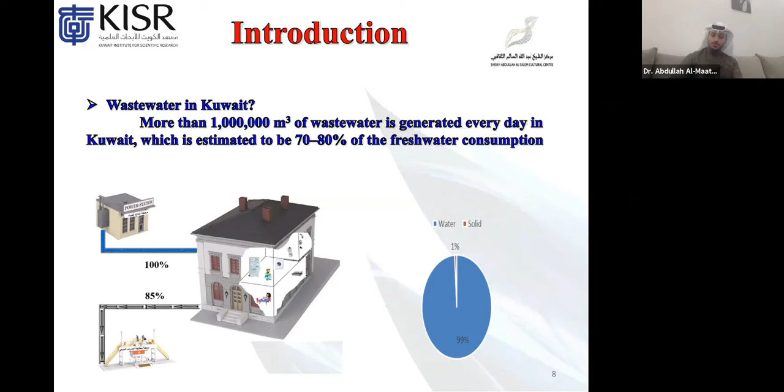Now let me give you a brief about how many wastewater treatment plants are in Kuwait and where the locations of our treatment plants are. In Kuwait we have 4 main treatment plants, and these plants are the domestic wastewater plants, which treat domestic waste from houses and from hospitals.

We have Riqqa, which was established in 1982, with a capacity of around 180,000 cubic meters per day. Al-Hayman, established around 2000, has a capacity of around 27,000 cubic meters per day.

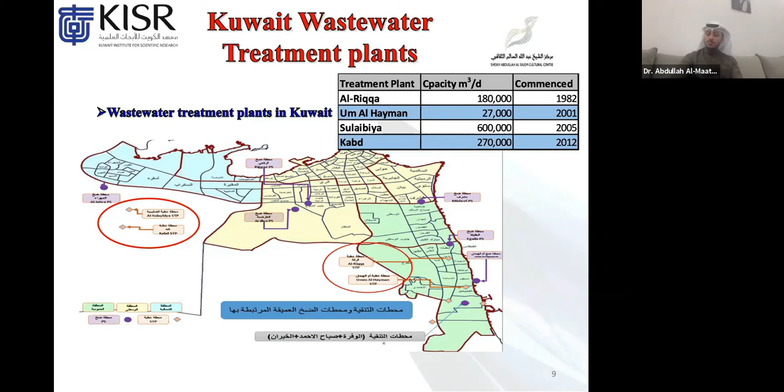We have the Sulaibiya wastewater treatment plant, which is the most advanced treatment plant in Kuwait, established in 2005, with a capacity of around 600,000 cubic meters per day. Finally, we have the Kabd wastewater treatment plant, established in 2012, with a capacity of around 270,000 cubic meters per day.

If we want to speak about the treatment processes in Kuwait, most of our treatment plants have common stages and processes. There are 3 stages of the wastewater treatment process, known as the primary treatment stage, the secondary treatment stage, and the tertiary treatment stage. In each stage we are tackling a different pollutant or contaminant.

We can also add one more stage, which we call the advanced treatment stage, used for a specific application. The more stages that we apply, the cleaner water that we can get. So it depends on how many stages we use to get clean water. I will go briefly through each stage, what it contains, and what contaminant we are tackling in each stage.

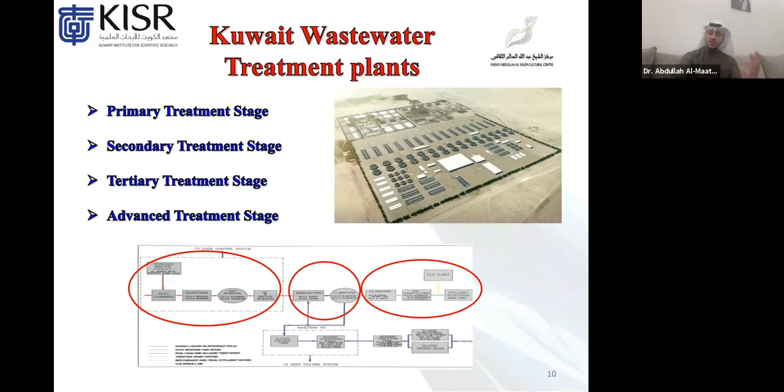In the primary treatment stage, the stage contains screening, grit removal, and oil and grease removal. First, when the wastewater enters the wastewater treatment plant, it reaches the coarse bar screens, which remove large particles before entering the treatment plant.

After the coarse bar screen, it goes through fine screens to remove smaller objects such as cigarettes, matches, and undigested food. We prevent all of these objects from entering the treatment plant to protect the pumps from any object that can destroy them.

After the fine bars, it goes to the third stage, which is grit removal, a gravel chamber which removes gravel and grit from the water. After the primary stage, we move to the secondary stage, which is the activated sludge. The activated sludge is the main process in the treatment plant, and this process is the basic process in all the treatment plants in Kuwait.

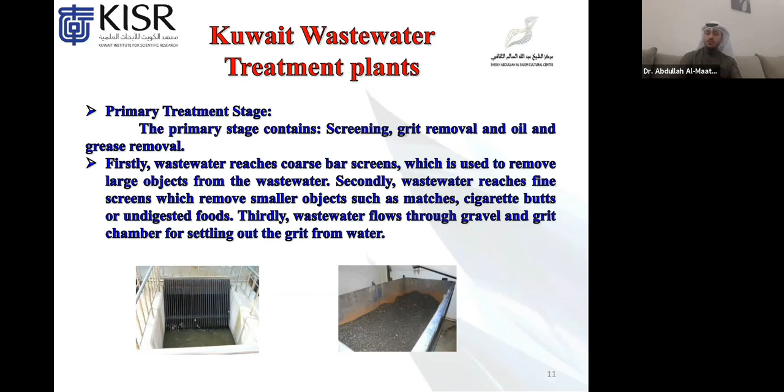It's based on a natural process, where bacteria is used to consume and biodegrade the organics, carbon, and nutrients in the wastewater. To simplify, the bacteria acts as a cleaner, eating and biodegrading the organics and pollutants in the wastewater. The bacteria acts like a human - it needs oxygen, it needs food, which is the pollutants and contaminants, and it needs air to breathe.

So air is supplied in this process, which is activated sludge. The air is supplied for two main reasons: first, to supply oxygen for respiration to the aerobic microorganisms; secondly, to maintain the microbial flocs in a continuous state of agitated suspension, ensuring maximum contact between the surface of the bacteria and the wastewater.

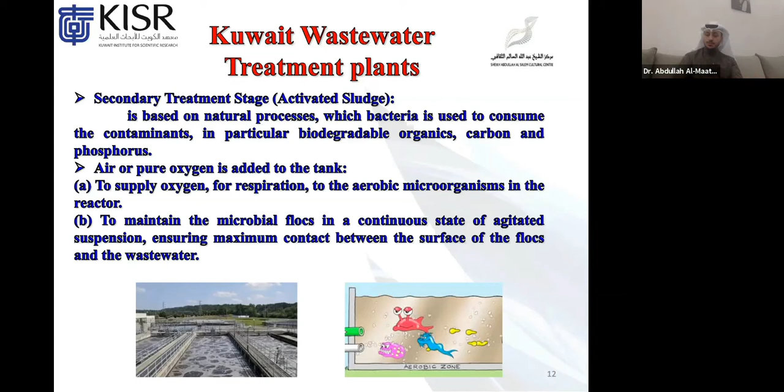After the activated sludge, it's moved to the clarifiers. In the clarifiers stage, which represents those big circular tanks in the picture.

The clarifiers play a crucial role in the treatment process, where the wastewater sludge mixture flows from the aeration basin, which is the activated sludge, into the secondary clarifier, where the sludge is settled and the clean water flows and is directed to the next process. The sludge is accumulated and collected at the bottom of the clarifiers, and then some of it is disposed in the treatment plant, and the other part is redirected to the activated sludge process, because this sludge contains a huge amount of bacteria, which we use to degrade and eat the contaminants in the wastewater.

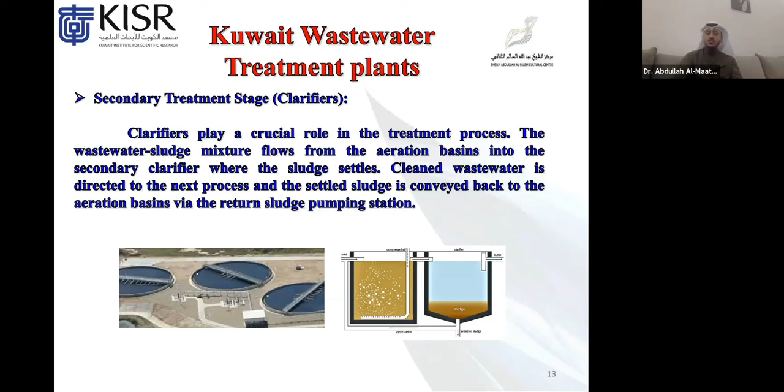After the secondary treatment, it reaches the tertiary treatment stage, which involves a series of additional processes to further reduce organics, turbidity, nitrogen, phosphorus, and pathogens. Most of the processes involve some type of physiochemical treatment, such as filtration, activated carbon adsorption of organics, and additional disinfection.

In Kuwait, we use two main disinfection technologies: chlorine and UV light. Chlorination plays a key role in the wastewater treatment process by removing pathogens and other physical and chemical impurities.

On the other hand, we use UV light to provide a rapid, effective inactivation of microorganisms through a physical process. The required contact retention time to achieve disinfection varies from some seconds to minutes, and could even reach hours, depending on the process used to disinfect the wastewater.

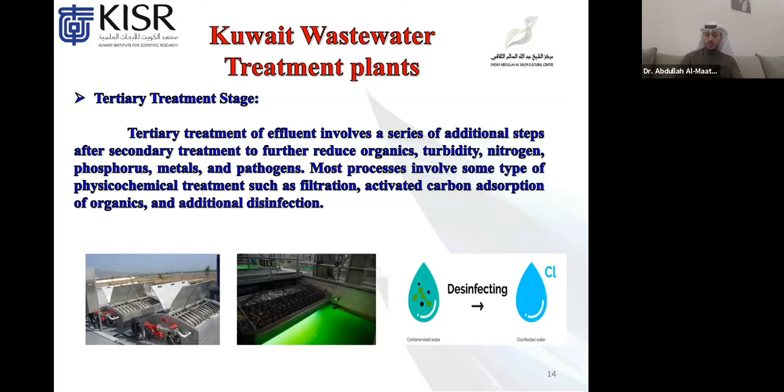After the tertiary treatment process, we move to the advanced treatment stage. By the way, we have only one treatment plant in Kuwait that uses the advanced treatment stage, which is the Sulaibiya treatment plant. I will explain more in the following slides.

In the advanced wastewater treatment method, we remove nearly all nutrients, suspended solids, dissolved solids, and all substances present in wastewater. We can use ultrafiltration or reverse osmosis in the advanced treatment process. When we use these processes, we produce safe and clean water for specific uses. The outcome of these stages is potable water that can be drunk, so we can transfer wastewater from a waste into water that's able to be drinking.

Reverse osmosis is one of the most used technologies around the world and the most extensive filtration, due to the small pore size, so nothing passes through the reverse osmosis unfiltered. All particles are trapped and tackled in this process. The RO system removes salts, fluoride, total dissolved solids, harmful bacteria, viruses, and other contaminants, producing clean water.

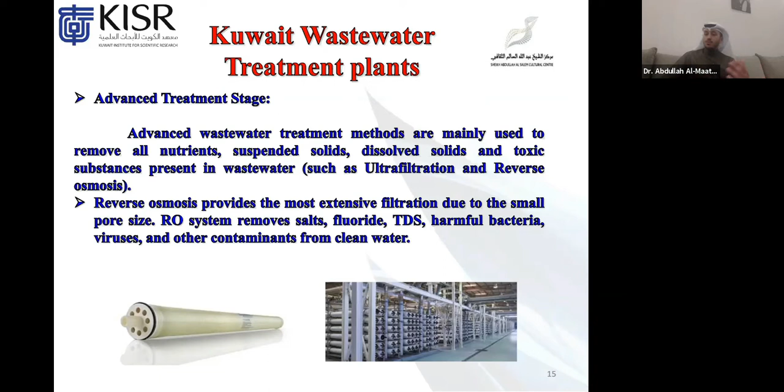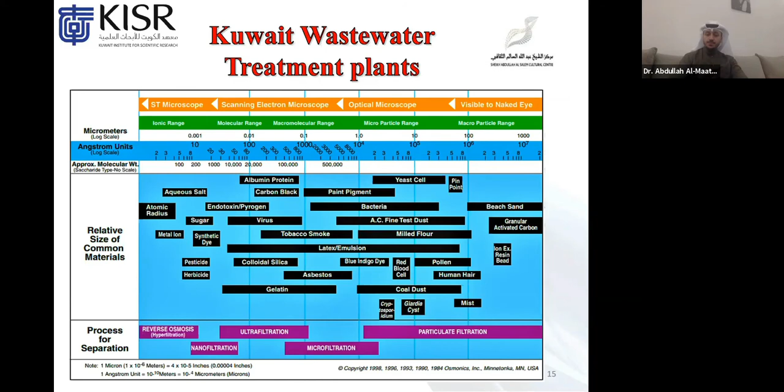As I mentioned earlier, we have 4 main treatment plants in Kuwait. Riqqa, Kabd, and Al-Hayman treatment plants treat wastewater through 3 main stages: primary, secondary, and tertiary. We have only the Sulaibiya wastewater treatment plant that treats wastewater through 4 stages: primary, secondary, tertiary, and advanced treatment, which is reverse osmosis (RO).

We have to mention that this plant is the world's largest facility of its kind that uses membrane technology to treat wastewater, and it's the only wastewater treatment plant in Kuwait able to convert wastewater into potable water that can be drunk.

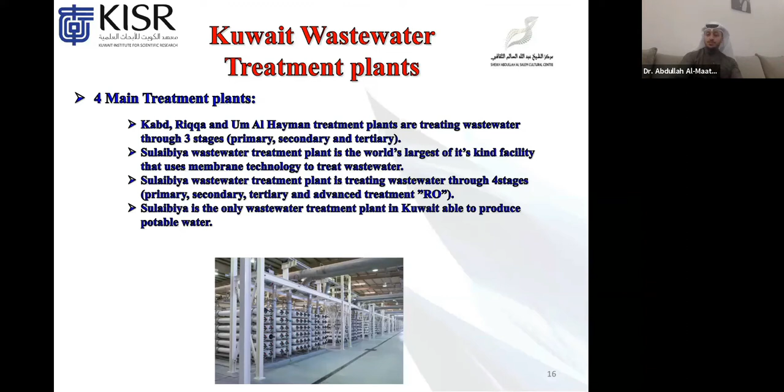So what are the main advantages of reusing treated wastewater? By using wastewater as a resource rather than a waste, we can reduce water bills. Instead of using desalinated water, which is an expensive process, we can use treated wastewater, not for drinking, but for different applications such as gardening, irrigation, and toilet flushing. We can also reduce the consumption of water resources, saving resources like underground water and keeping them for the future.

We can reduce the amount of pollution going into the waterway, saving our environment and aquatic life. We can also help save money on new infrastructure for water supplies and wastewater treatment.

The desalination process costs around 6 KD per 1,000 imperial gallons, while treated wastewater to the tertiary level costs only 0.6 KD, around 10 times cheaper than desalinated water. There's a big gap between the cost of desalinated water and treated water, so we can use treated water for different applications and save a lot of money.

Finally, it decreases the demand on infrastructure for sewage transport, treatment, and disposal, allowing it to work better and last longer.

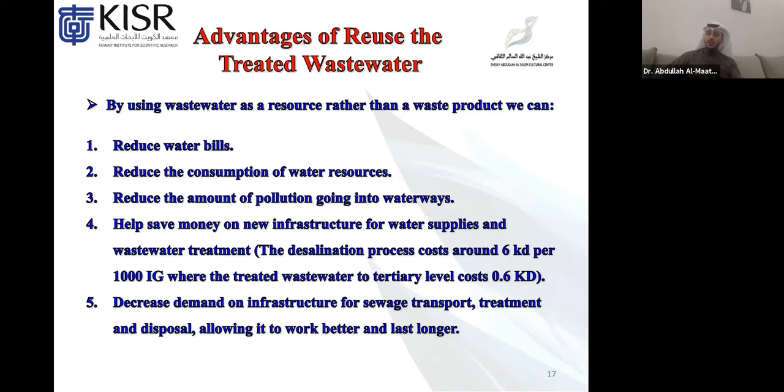Before the treatment process, and before we choose the best technology to treat wastewater, there are different questions we have to answer. First, which contaminants in wastewater should be removed? Are we looking for something, or do we want to use the treated wastewater for a specific application? To what extent, what range, what concentration of these contaminants? And finally, where should wastewater be placed, for what kind of application do we want to use the treated wastewater?

To answer all these questions, we should know the local conditions of the country. We should also know the environmental risk, if there is any hazard to using treated wastewater in this application or not. And we should know the economic feasibility: is it economic to use treated wastewater instead of desalinated seawater or not? We have to answer this question to understand all the treatment processes.

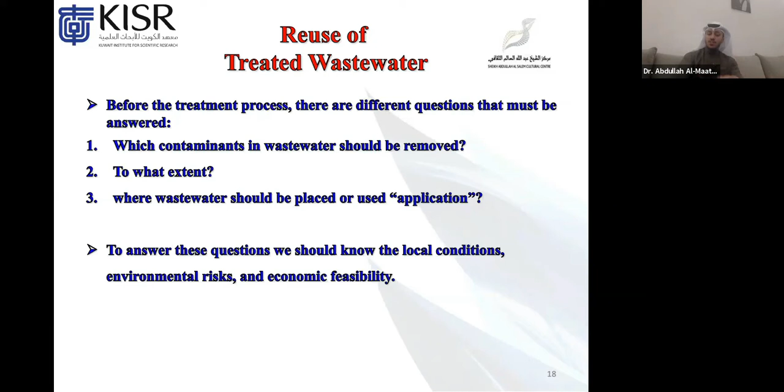For example, these two tables are from the Kuwait EPA. The first table on the left is the guidelines for water use for irrigation. So if we want to use the wastewater for irrigation, we have to treat it to reach these limits. There is a maximum value, so we have to be sure that the contaminant in wastewater is below all of these values.

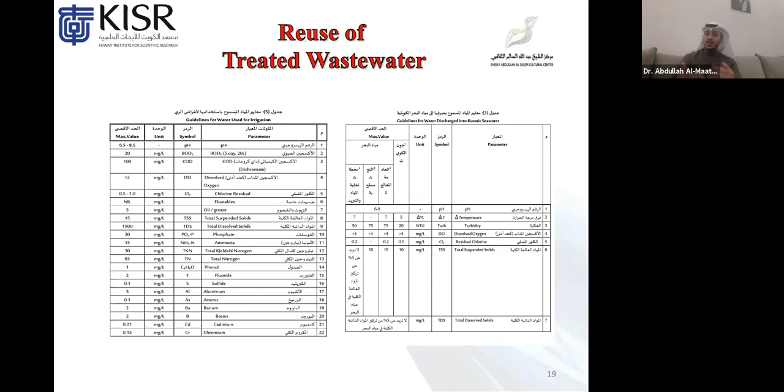The table on the right side is the guidelines for water discharge into Kuwait seawater. We cannot discharge the wastewater directly to seawater; we have to treat it and achieve all of these parameters, making sure the concentration of the contaminant is below this level. After that, we can dispose or discharge the treated wastewater into the sea. So based on the application, we have to design our treatment plant and treatment processes.

These figures will summarize all, giving you the whole picture. We will start from the potable water distribution, which in Kuwait is the desalination plants. So it starts from here: the water goes through the network to the house. Then in the house, the potable water converts to wastewater, and the wastewater is collected in the sewer system. The sewer system takes it and transfers it to the conventional wastewater treatment plant.

We have to treat it to the tertiary level, and then we can discharge it to the sea or to the land. If we want to use it for different applications, we have to apply the advanced treatment stage, and after that we can use it for irrigation, energy, or industrial uses. Or we can store it or re-inject it into the underground water so we can use it in the near future.

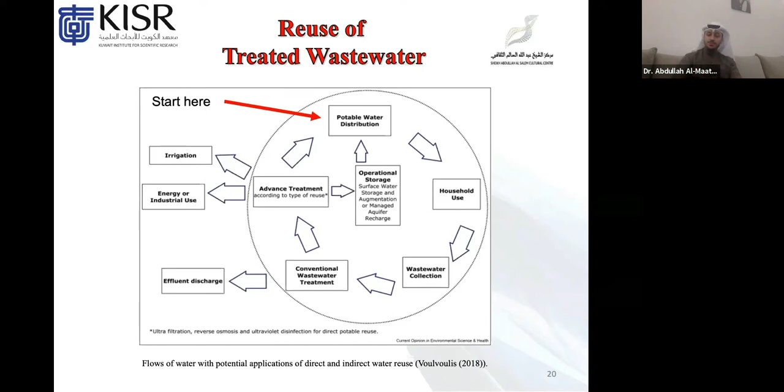If we want to integrate treated wastewater into our community effectively, we have to give close examination to the public health issue. By this I mean we have to understand and identify all the hazards that can be exposed to humans if they use the treated wastewater.

Second, we have to give infrastructure and facility planning: do we have the infrastructure to use the treated wastewater for this application or not? Thirdly, we have to understand the treatment process reliability: is the process reliable or not? Finally, we have to understand the economic and financial analysis: is it feasible to do all of this, or do we just use the desalinated seawater and that's it?

There are different applications to use treated wastewater, but in this presentation I will focus on three main applications: first, urban uses in the city; second, agricultural irrigation; and third, recreational uses.

In urban uses, we can categorize treated wastewater into two main categories. The first category is treated wastewater to the secondary level, and the second category is tertiary level treated wastewater. By now you should understand the difference between the secondary level and the tertiary level, where the more levels we add, the cleaner water we can get.

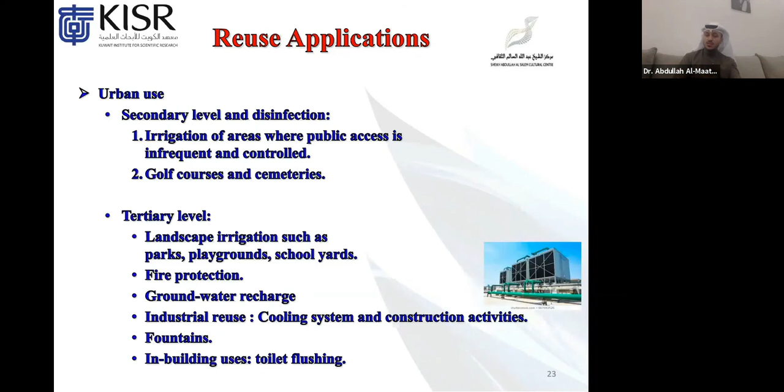We can cool hot machines by using cooling towers, and we can use it in construction. We can apply it for fountains, create new artificial lakes, and provide fountains with treated wastewater. We can use it in buildings for toilet flushing.

In Japan, they are applying this technology where houses are connected to treated wastewater, so they can use treated wastewater to the tertiary level for flushing. So instead of using potable water, which is very clean water, for flushing the toilet, we can use treated wastewater.

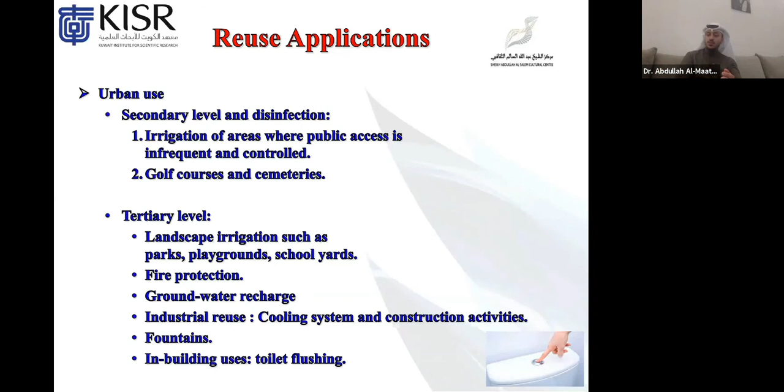On the other hand, in agriculture irrigation, we can use secondary level treated wastewater for fodder, seed crops, pastures, and sod farms. By this, I mean we can irrigate farms or plants that are not consumed by humans, providing different kinds of plants with treated wastewater.

But at the tertiary level, treated wastewater can be used for crops grown for human consumption that are consumed uncooked, such as lettuce, corn, and different vegetables. We can use treated wastewater for this type of crop.

In addition to recreational uses, we can use secondary level treated wastewater for fishing, boating, and other non-contact recreational activities. We can also use tertiary level treated wastewater in lakes, boats, and ponds that are used for swimming and snorkeling. So there are different applications where we can reuse treated wastewater in our environment and community.

Not only that, but in some cases a closed loop recycling system has been developed to treat water from a single process stream and recycle the water based on the same process with some additional makeup water. For example, NASA has evaluated and recommended reuse of water during long duration space missions, where wastewater generated by astronauts in the space station can be treated, recycled, and reused for different applications.

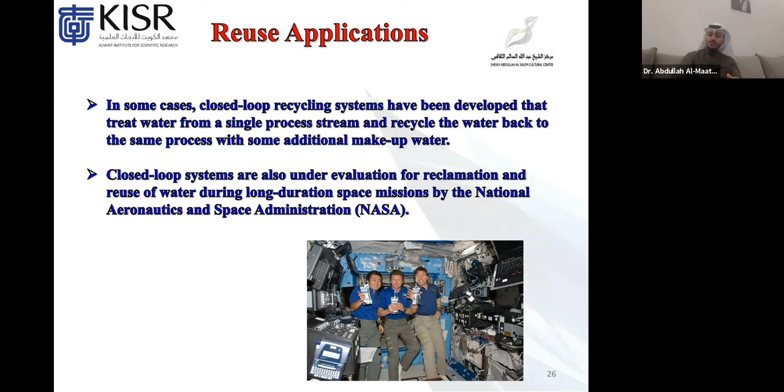Besides that, we can use wastewater as a source of precious metals. As I mentioned earlier, industrial wastewater contains a huge amount and concentration of different metals. Industries such as mining, metal plating, batteries, and fertilizers contain high concentrations of heavy metals. Different precious metals such as silver, gold, and platinum can be found in these streams.

We can recover and extract all of these metals from these streams using different methods such as chemical precipitation, coagulation, ion exchange, membrane filtration, adsorption, electrochemical treatment, and photocatalysis. All of these technologies can be used to extract and recover these metals from wastewater.

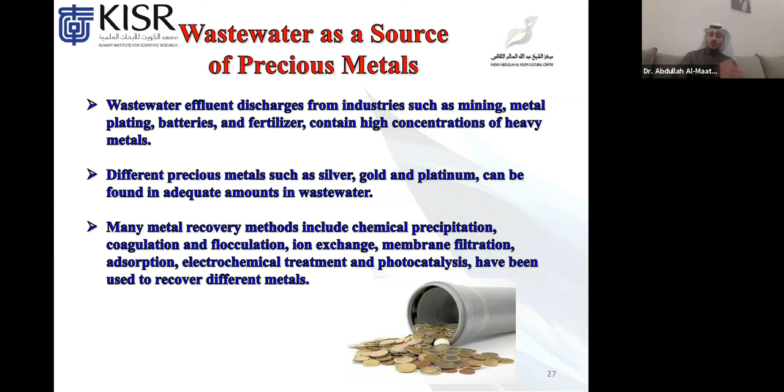By recovering these metals, it's a source of income. We can sell these metals, and they're very expensive, so we can create a new source of income. Instead of waste, it can now be a source of income.

Furthermore, most recent research has focused on recovering or extracting energy from wastewater. Wastewater contains a huge amount of energy in different forms, such as chemical, thermal, and kinetic energy. The chemical energy contained in wastewater has been estimated at approximately 10 to 14 kilojoules per gram of COD, while thermal energy could yield about 21 to 30 megajoules per cubic meter, equivalent to 5.8 kilowatt hours per cubic meter.

It's a huge amount of energy that can be extracted from wastewater. The energy stored in wastewater is about 6 to 9 times higher than the electrical energy needed for treatment. So if we can extract all of that energy, we can sustain the operation of the treatment plant without adding any source of energy. The treatment plant can be sustained by itself and operated directly without any external energy source.

Different technologies have been discovered and used recently, such as microbial fuel cells and microbial electrolysis cells, that generate energy in terms of electricity or hydrogen gas. And as we all know, hydrogen gas is a very effective gas that can be used in different applications to generate energy.

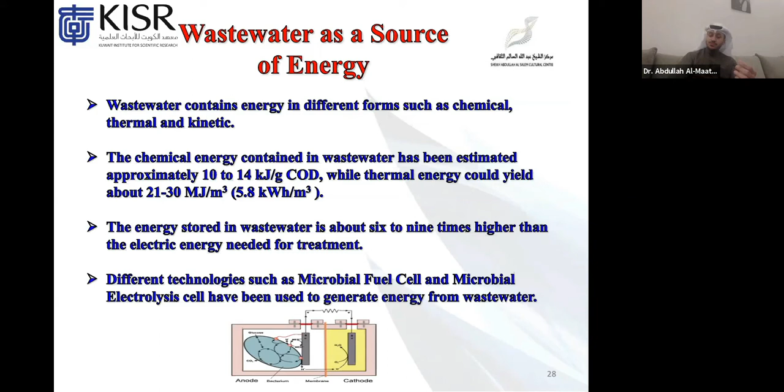In addition, as I said earlier, we have about 1% of solid materials that can be collected from the wastewater treatment plant, and we call that sludge. Sludge is the solid particles collected during all treatment processes in the plant, and it is very toxic, containing different metals and contaminants. We can use that sludge to generate energy or as a fertilizer.

There are different technologies, such as anaerobic digestion, that can use the sludge to generate energy by converting the organic materials in the sludge into methane gas. Methane gas can then be converted to energy, electricity, or heat. Also, after proper treatment of the sludge, we can use it as a fertilizer for crops. So we are converting waste from wastewater into useful products that can be used in different applications.